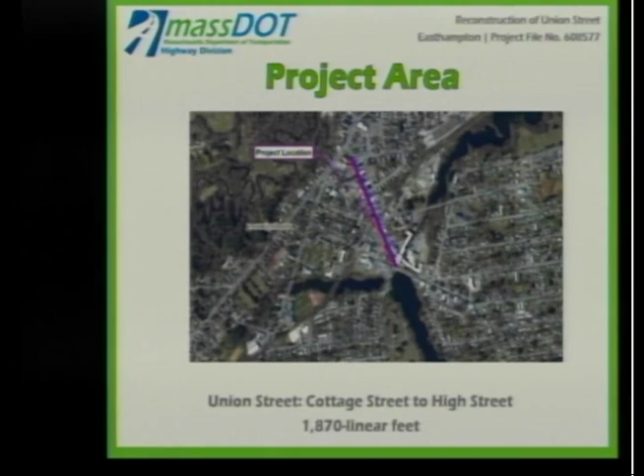I'm going to be speaking to the presentation that's on the screen over there to your left. Union Street, the project, as was noted, is from Cottage Street to High Street. It's approximately 1,800 linear feet.

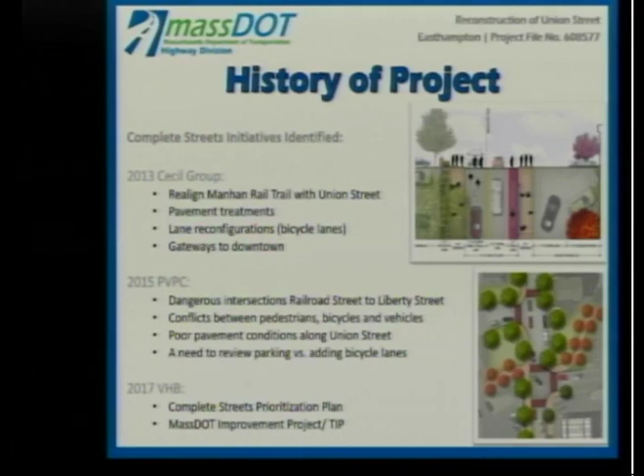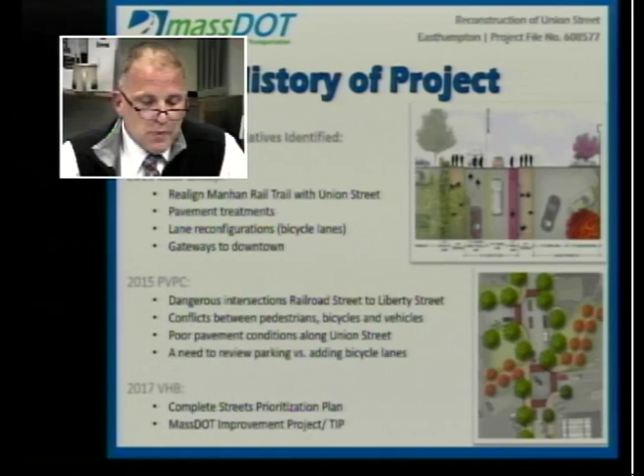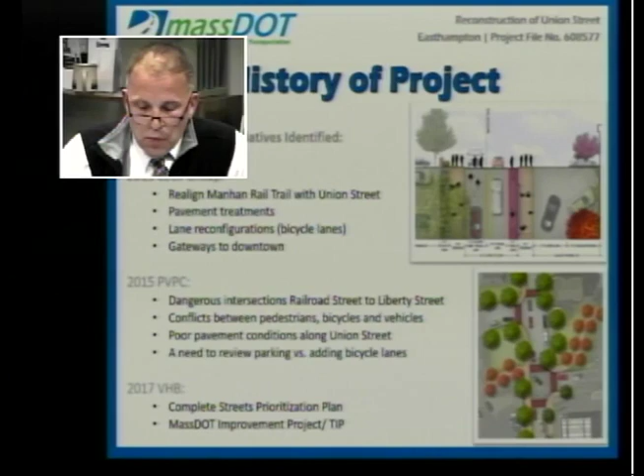There's a little history to the project. This corridor's been talked about since 2013. There was a planning group that looked at some realignment of the Manhan Trail, some different pavement treatments. It's pretty narrow out there today. They were looking for ways to reconfigure the lanes to include bicycle lanes and creating more of a gateway in the downtown. That was in 2013. In 2015, the Pioneer Valley Planning Commission came in, looked at some safety assessments and intersection conflict points, identified poor pavement conditions, and then a need to review parking and add bicycle lanes throughout the corridor. In 2017, VHB has been working with the city to identify improvements for the corridor, and as part of the Complete Streets Prioritization Plan, this project was reviewed, and then it spun out of that as part of the state's Transportation Improvement Program, where we've acquired funding for the 2022 TIP.

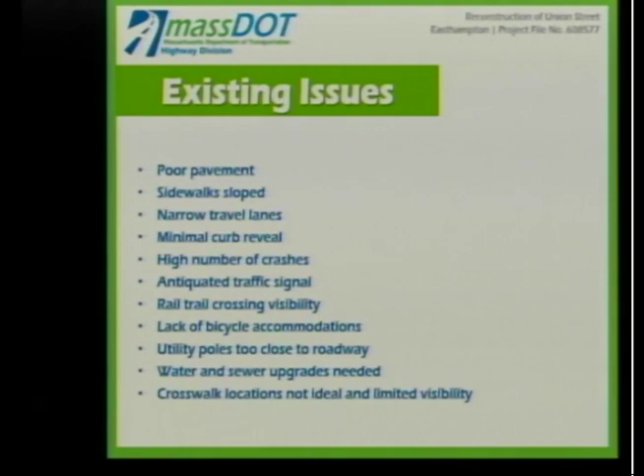So I'm going to run through why we need this project. I think a lot of you frequently visit Union Street, but there's poor pavement out there today. It's in disrepair. The sidewalks are significantly sloped from the face of the building down to the street level. We're going to try to correct that. The travel lanes are narrow. The curb reveal is minimal in a lot of areas, which makes it unsafe.

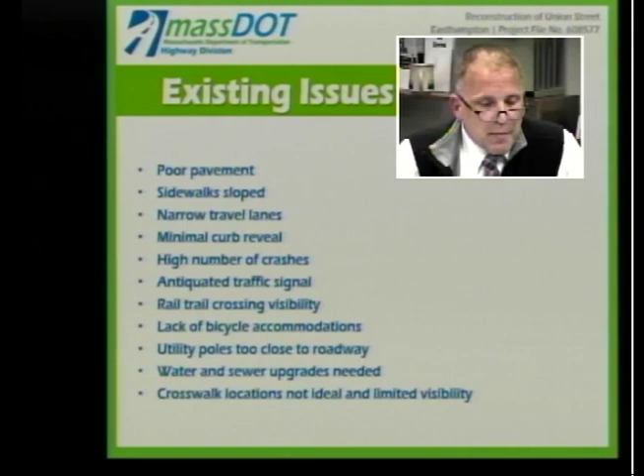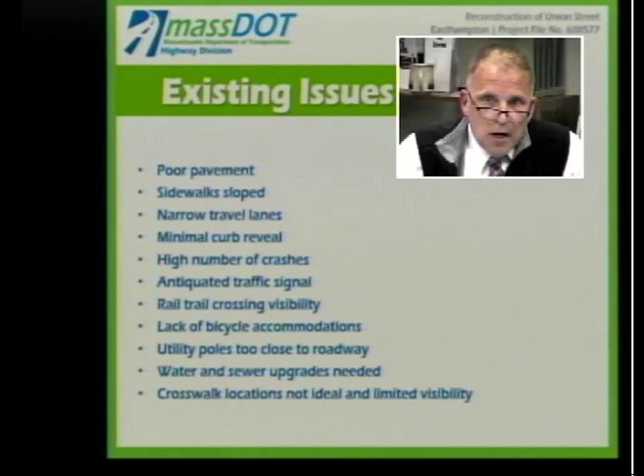There's a high number of crashes. The traffic signal is old and antiquated. We want to enhance the rail trail crossing visibility. Obviously there's a lack of bicycle accommodations. A lot of utility poles, if you haven't noticed, are right on the edge of the roadway adjacent to the curb. The city has identified water and sewer upgrades that are needed, which will be advanced as part of the design. And then the crosswalk locations have been modified and need to be spaced properly.

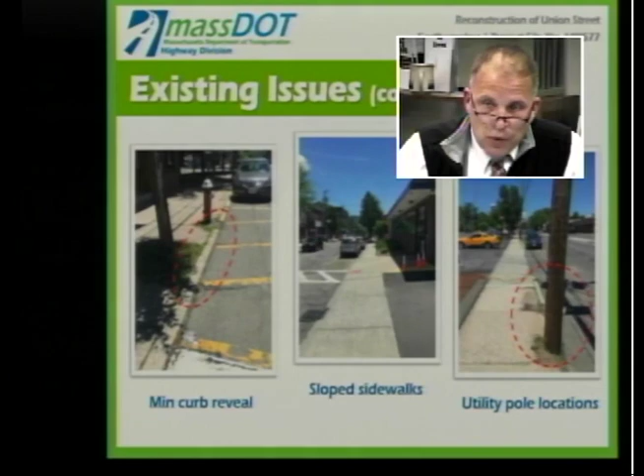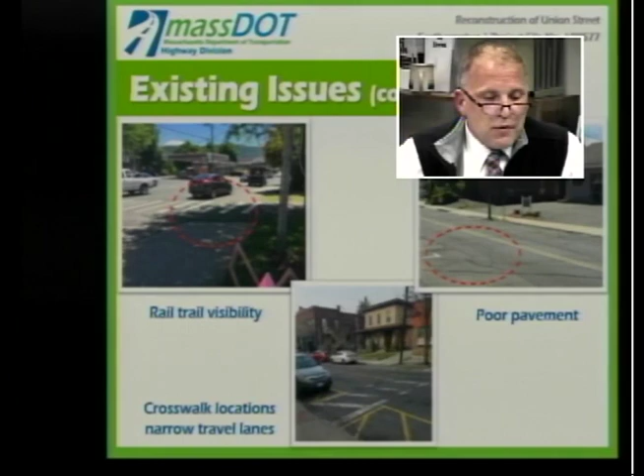These are just some photos along the corridor. The first one on the left shows that the reveal is pretty low on the curb. Traditionally it's like a 6-inch reveal; there's probably maybe 2 inches or less here. The sloped sidewalks are shown in another photo in the center, and then utility poles are really close to the edge of the roadway. Some more photos show the visibility of the rail trail, kind of hard to see in some areas, and bicyclists can just drive straight across, so we want to enhance that. Crosswalk locations are blocked by parked cars, and the pavement conditions are in pretty poor condition.

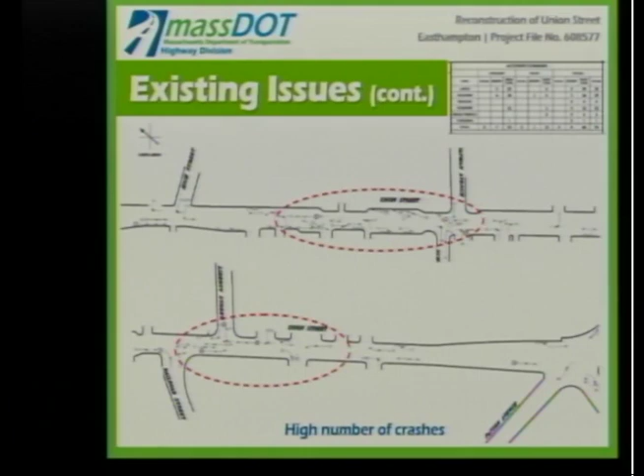As part of our design process, we had to look at crash data for the corridor. This is a little small, but you can see all the markup and points - we basically looked at all the police records and crash data, and each arrow represents a collision or conflict that happened in the roadway. What we found was that the existing roadway is narrow, and the interaction with on-street parking and all the other users of the roadway results in a lot of crashes in the vicinity where those red circles are, north of School Street between High Street, and around Liberty Street to the south.

So some of the goals of the project are to improve intersection and roadway safety. We want to provide wider travel lanes if we can, shoulders and bicycle accommodations, and we want to upgrade the traffic signal at Payson Avenue.

Drainage, water and sewer: we're going to install new drainage structures and catch basins, and there's going to be a new water and sewer system that the city will replace, infrastructure that's around 100 years old. The pavement is in very bad shape, so we're going to do a full depth reconstruction, pulling everything out and putting in all new pavement and a new base.

There's no bicycle lanes, and people come in and use the Manhan Trail and try to get on the Union Street corridor, but there's no accommodations today. The cross-section is a little tight when you look from face of building to face of building, so we're limited in what we can and can't do. We'll get into more detail, and I'm sure you'll have questions that I'll do my best to answer to explain the design moving forward.

Sidewalks and crosswalks: all new sidewalks on both sides of the road. We're going to raise the profile, meaning we'll increase the roadway elevation by 3, 4, 5, or 6 inches depending on where you are, to lessen the sloped sidewalk from the building. So we're improving that by bringing the roadway up so you have a more level entranceway from the street to the buildings.

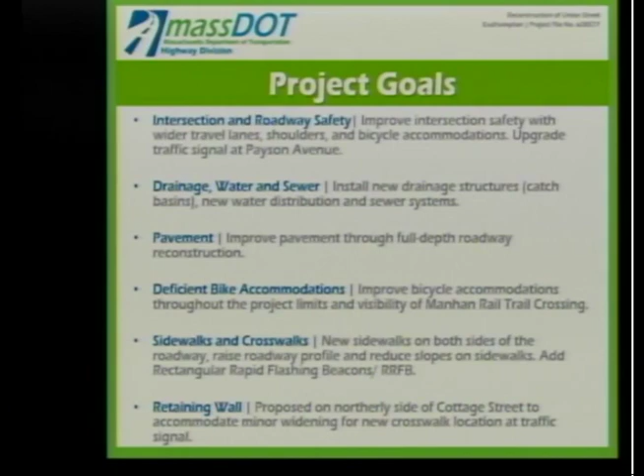A lot of you saw this plan—it's probably a little hard to see from this screen, but it was up on the wall and on another easel. This basically is the design overlaid on an aerial photo. We thought this would be a good representation given the urban nature and density of the area, so you could see the existing and proposed conditions together.

This particular section from High Street down to School Street and to the Manhan Trail will have a 7-foot parking lane on the east side of the roadway and a 6-foot bike lane. East side is on the top of the page, working down: 7-foot parking lane, 6-foot bike lane, 11-foot travel lane, and then your double yellow center line.

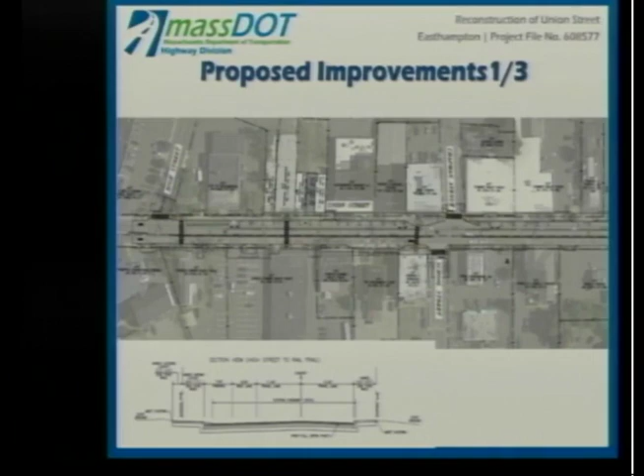For this particular section of the roadway, we'll have a 13-foot lane with a sharrow, which is 11 feet and a 2-foot shoulder. We can't fit anything more than that because there are a couple of buildings right at the back of the sidewalk, which doesn't give us the luxury of adding an additional bike lane in that southbound direction.

This is the next stretch, which comes after the south side of School and Chapman, coming into Railroad Street. Railroad Street is realigned slightly at the intersection to provide users of Railroad Street more visibility to the Manhan Trail when turning from that street. It also affords us the opportunity to keep the crosswalk on the north side of that intersection.

The Manhan Trail will be realigned a little bit to avoid the straight shot through the Union Street corridor. Bicyclists will be encouraged to dismount and cross at the mid-block crossing. We're going to use a brick treatment similar to what's on Cottage Street, raised around 3 inches as a tabletop-type crosswalk to bring more awareness to that crossing.

When you get beyond there on Liberty Street to the south, as you go to Payson Avenue, the cross-section changes the roadway a little. No on-street parking: there's a 5-foot bike lane, 11-foot travel lanes in both directions, another 5-foot bike lane on the other side, and sidewalks on the outside edge. There will be a buffer between the large parking lot and the sidewalk to provide more separation between parked cars and those using the sidewalk.

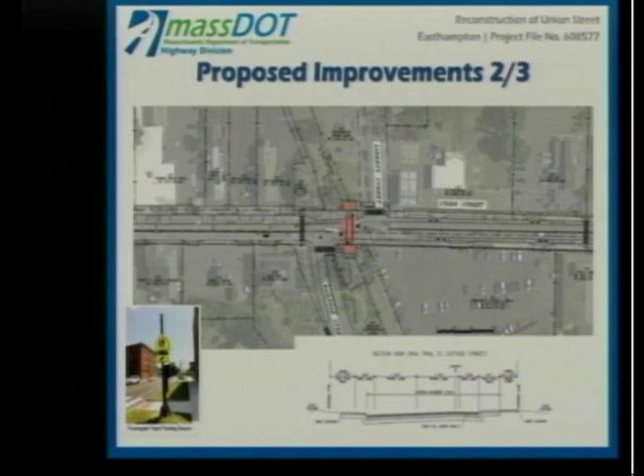The last graphic here shows the improvements at the intersection. Again, we're adding that crosswalk across Cottage Street, maintaining some of the existing parking in front of the businesses at the beginning there. For the most part, the signal will be updated to be the latest and greatest accommodation so it can activate appropriately with the current traffic loads.

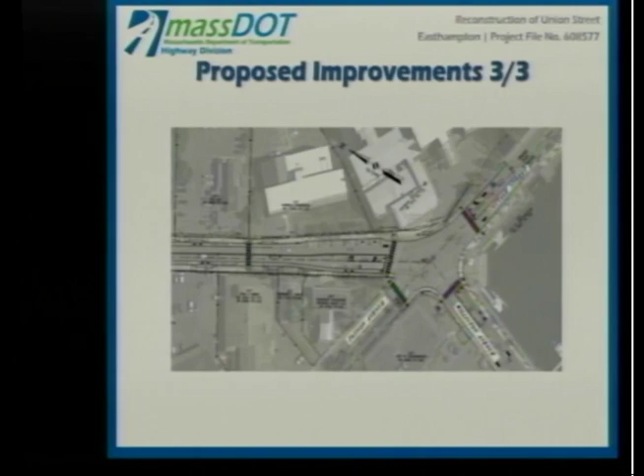But the lane configurations are pretty much staying the same. The driveway to the Riverside building will be part of the signal and will be activated when somebody pulls out of the parking lot.

So I'm sure there'll be a lot of questions about on-street parking, and I will say that we looked at this pretty aggressively. It was very hard for us to come up with a desirable cross-section without impacting parking spaces.

If you were to restripe those parking spaces today to meet current standards, you would lose 8 spaces. Those spaces would go away - 5 of them north on the easterly side, and 3 on the westerly side.

For availability, the city did a count in the morning and evening, and occupancy varied between 40 and 78%. Typically when parking is around 85% occupied, you'd say you need more. The highest utilization was on the upper sections of the street on the easterly side, in the central areas near the coffee shop and some restaurants up there.

As part of the project, we're going to have 35 parking spaces, so we lose 30 spaces. However, 7 of them are on the easterly side, and 23 are on the westerly side, with the majority being the ones in front of the big parking lot in the shopping plaza just south of the Manhan.

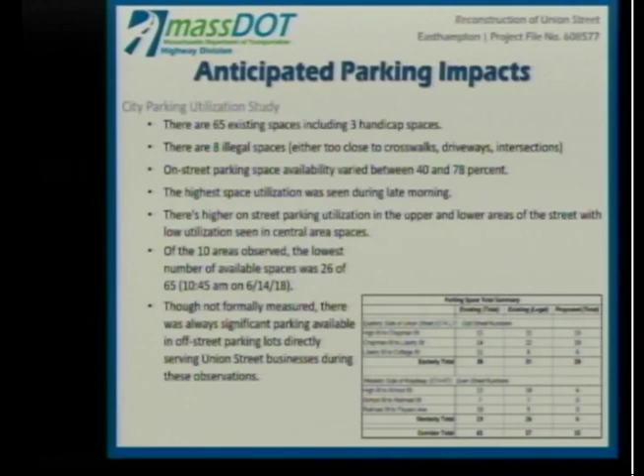We tried to maintain on-street parking where there wasn't adjacent off-street parking. So if a business has off-street parking, we were hoping people would use those spaces instead. It also made sense to put all the parking on the easterly side, given where the utilities were and how the cross-section would fit into the constraints.

Potential treatments we'll be looking at as we advance the project include enhanced crosswalks, striping, and things like that. We're going to do curb extensions where the crosswalks are along Union Street to get pedestrians standing on the outside edge of the on-street parking, where today they'd step into the roadway and be blocked by parking. This gets them out a bit to the edge.

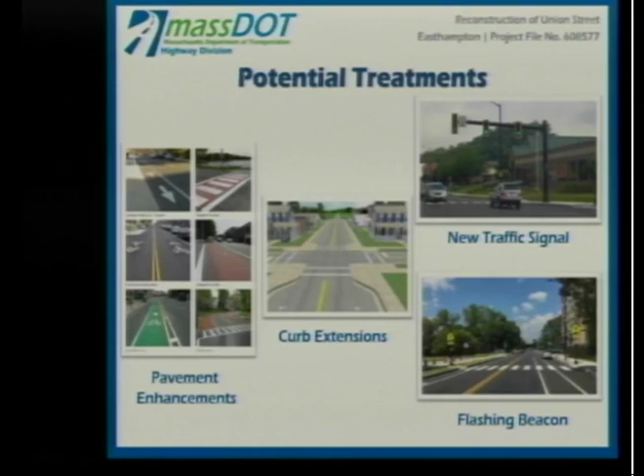A new traffic signal would be installed, assuming some sort of black or stainless signal, and we'd work with the city to make sure we have the appropriate color or feature. The flashing beacon shown lower is North Main Street in Springfield, as an example if somebody wanted to see one - that's where that photo comes from.

We had one meeting with the businesses and did some renderings. This is a before and after looking north, just south of the Manhan Trail, which is in the center of the picture. It shows how things might look with the pavement - you see the bike lane on one side and the rapid flashing beacon in the middle.

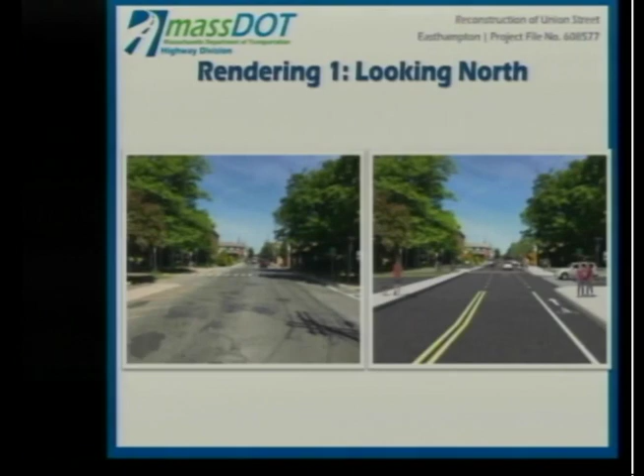The other rendering we did was looking south towards the Manhan. You have the bike lane traveling northbound, and you can see the bicyclist in the bike lane. Then there's the sharrow and shared use going southbound, with on-street parking on the easterly side as we talked about.

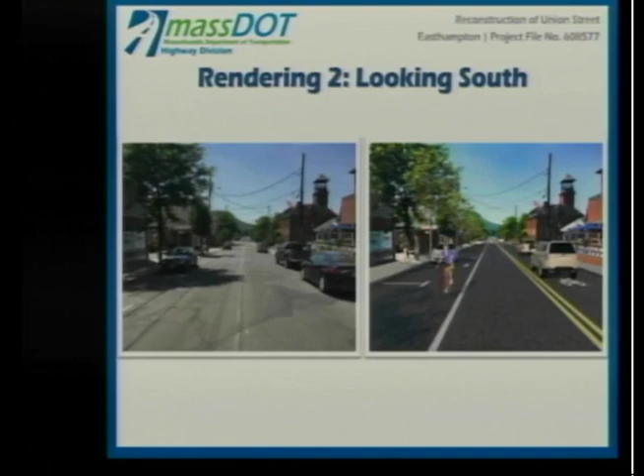So from us, we submitted 25% designs in February. We're here today doing a public hearing, and we anticipate final engineering to happen over the next year or so, as Josh had mentioned.

During construction, we're anticipating lane shifts and lane closures with alternating traffic during working hours. We're not anticipating any road closures or detours at this time, although that might be challenging to maintain some of the on-street parking - so it's something we'll look at closer in the next design phase.

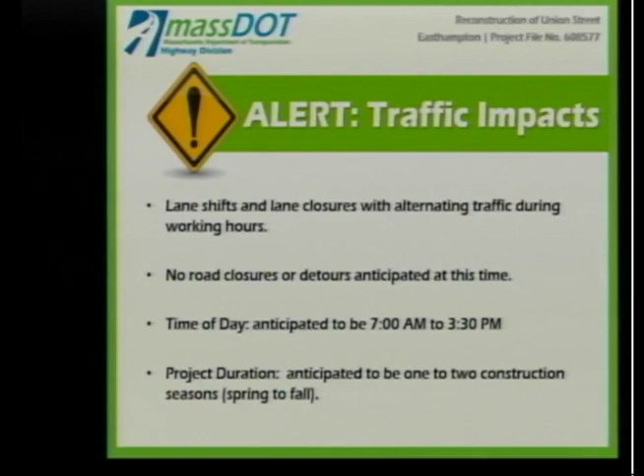Construction hours are anticipated to be somewhere between 7 a.m. and 3:30, with some restrictions depending on traffic flow. We're anticipating 1 to 2 construction seasons, or probably around 18 months.

The only environmental permitting we have is Conservation Commission coordination, either an RDA or an NOI, working within the buffer area of the pond. The next step is to review comments from this meeting. We're going to advance plans to 75 and then 100%, and then a plan, spec, and estimate design phase. Funding, as Josh noted, is available from the fiscal year 2022 TIP.

And now I'll turn it back over to Josh.

Thank you, Matt. Before I open the hearing to questions and comments, I'd like to explain that procedure. First, as stated previously, the purpose of this hearing is to solicit your input regarding the project. As the plans are not yet complete, we may not be able to answer all of your questions or respond to all your comments at this time.

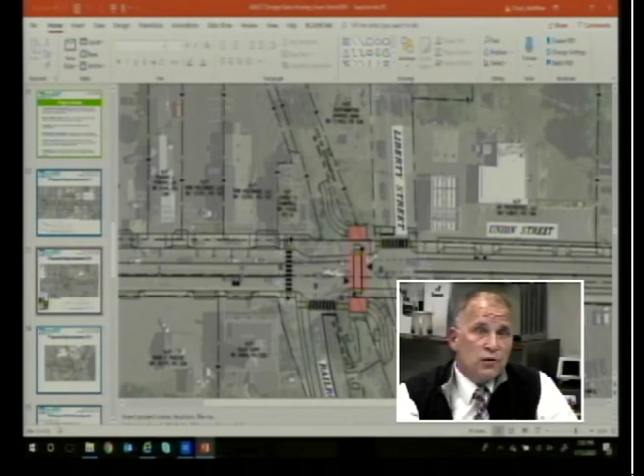And for the sidewalks again, you say you're going to bring it up. What's the profile going to look like if you know now? So if I'm using my walker going down either side of Union Street, is there going to be still a lot of places you could just walk right into the door without a step up, or what's our ADA accommodations going to be?

So the ADA accommodations into the buildings won't change, but the sidewalk across the front of the buildings won't be as steep if you're walking along, right, with that's the usual, so from right to left or left to right, whatever, it won't be steep that way.

So the curb's going to come up, which will come up with the profile of the roadway, and then you'll ramp down at every driveway, and so the driveway aprons will be redone to current standards, so that when you're crossing at a driveway, you won't have that situation I think you were mentioning before about having a lip where your walker couldn't get across.

Yeah, my concern is just like right now there's, like Manchester's hardware, because I remember you can walk on the sidewalk, you can walk right in the front door. There's no step, there's nothing. That'll remain, that'll be the same. Yep, and that would be the same for every property.

First off, I'll go in reverse order. The 7-Eleven, it's up on the screen there, the low reveal in the curb will be fixed, and the two driveways will be defined. I think there are a couple bollards there protecting the hydrant from people backing into it. I didn't realize it was a low curb, I thought it was just... I mean, the driveway's pretty defined there, so you won't have that flat, continuous open driveway, it'll be better defined.

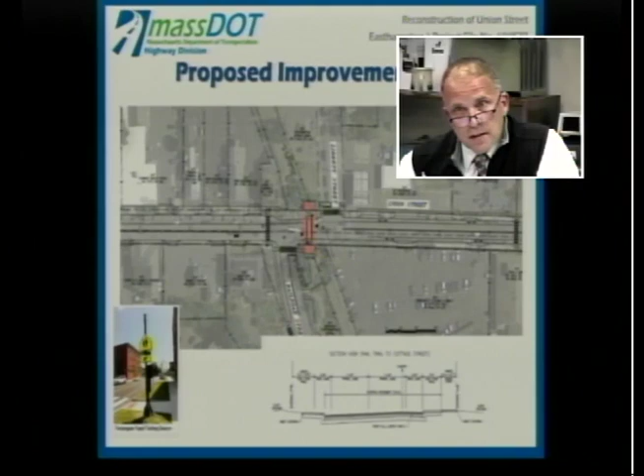We'll look at the bus shelter at the Rite Aid, or anywhere on that side of the street really. It is tight, it's a tight fit.

You have some overhead signs coming off the sides of the building facades and things like that. We also work with PVTA to find out where their stops are, if they want to consolidate or stop. Ultimately it depends on ridership. If they really want a stop there, they usually would maintain the shelter if it's installed.

The additional raised crosswalk that was brought up, the complete streets policy—like Josh said, there are a couple different policies. If you Google MassDOT complete streets policy or healthy transportation initiatives, there are things out there describing what those policies are, and other manuals that go with that as well. You could probably get some of that information there.

On reversing the parking and the bike lanes, we did look at that. We looked at ways to do a shared use path, and we looked at taking the bike lane and putting it on the inside. Unfortunately, that requires more width, which we don't have.

We're down to the inch, but almost—I like to say we're not building a watch, but we're pretty close to it. But we looked at that option. There would be a lot of impact to utility poles, and the businesses' public space would be lost. We'd have to take it for right-of-way for a handicap accessible path, so the businesses that have tables and chairs out there today would have to go away.

There wasn't a way to avoid that—we felt it was more disruptive to the businesses and to the corridor. A lot of that sidewalk stretch from Chapman up is pretty wide, and if we were to do a two-tier bike lane, like you were talking about, having the bike lane and the pedestrians separated so you wouldn't have bikes flying by doors and people stepping out getting hit by a bicycle, that requires the curb to come out a lot further, which means parking gets lost.